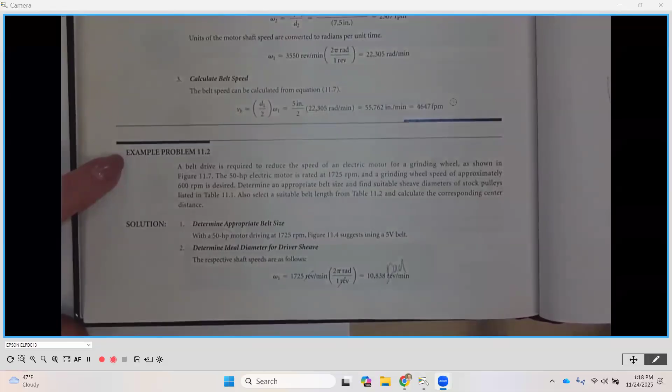Okay, so we're going to look at example problem 11.2, on page 306. Here we have a belt drive required to reduce the speed of an electric motor for a grinding wheel, as shown in figure 11.7, at the top of the following page. So down here is our motor, and up top here is the grinding wheel.

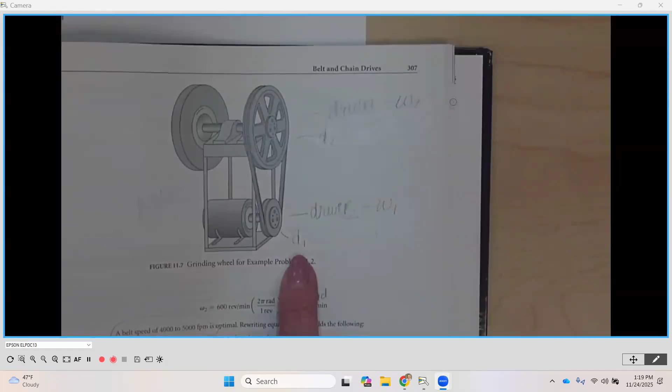As you can see, coming out from the motor there's a shaft, and mounted to the end of that shaft is a sheave. This is what we're going to call the driver. This is going to represent our omega 1, which is also the diameter of the shaft or the diameter of the sheave on that shaft.

Now there's going to be a belt, we're going to have to determine what that is. And then up on top, notice we have the larger sheave, which is called the driven. That's going to be our W2. It is on a shaft that is connected, driving at the same speed as this grinding wheel out here.

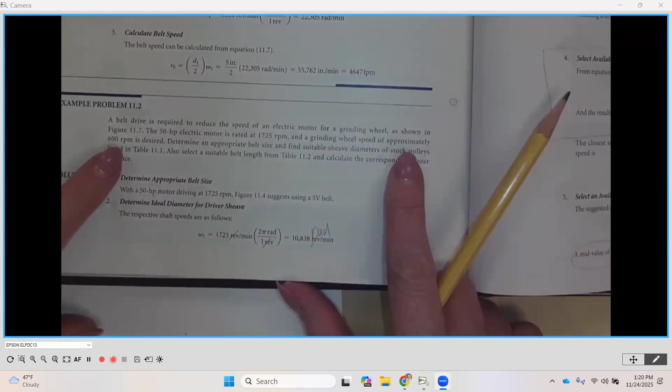Now they're telling us that the electric motor is a 50 horsepower motor, rated at 1725 RPMs, and the grinding wheel speed needs to be approximately 600 RPM. So approximately doesn't mean it has to be exact, but we got to be right around 600 RPM. So we're going from 1725 to 600.

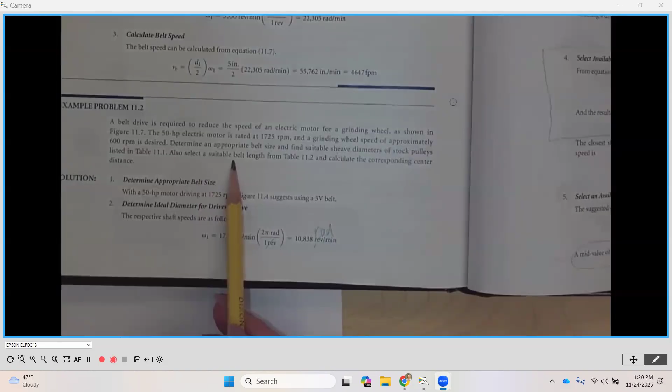They want us to determine the appropriate belt size and then find suitable sheave diameters using standard sheaves. Then select the suitable belt length from the standard table, and calculate the corresponding center distance. So this is a very practical problem for out in industry, where we're just given where the motor is, what we want our output speed to be, and now you specify the belt, the sheaves, and what the center distance is going to be.

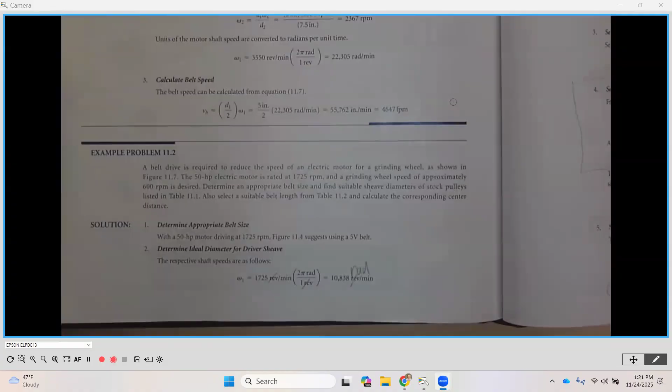So first things first, we're going to pick our belt. Actually, before we start picking our belt, let's identify the items that we are given and then the items that we need to find. So if we look here, we're given that our electric motor is 50 horsepower and is going at 1725 RPMs. As we said, that is our driver, so that's going to be our omega 1 or W1.

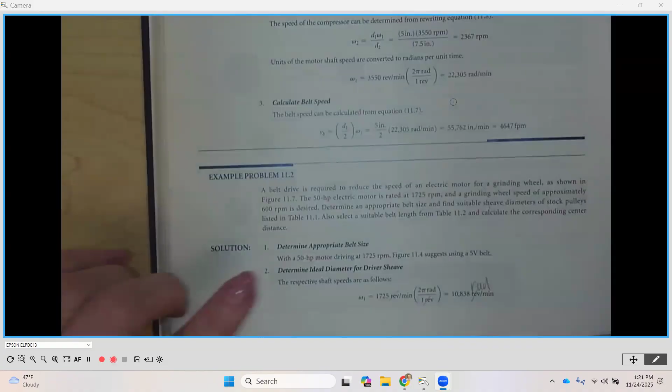So here we have W1 is 1750 RPMs. Okay, I'm sorry, 1725. 1750 is a more common one, but 1725 RPMs. And the power is 50 horsepower.

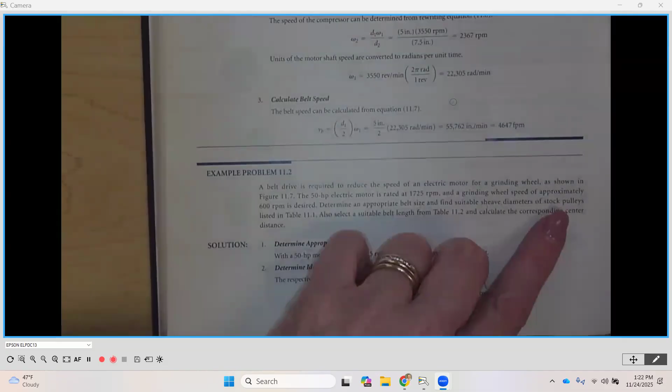We're also given that the desired output speed of the grinding wheel needs to be about 600 RPMs. So W2 is going to be 600 RPMs, and I'm going to say approximately. That's a target, if you would.

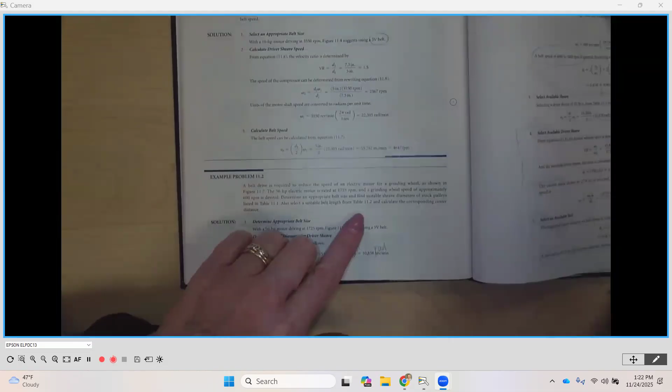And what we want to find is going to be the belt size. We need to find our D1, which is the sheave diameter 1, D2, sheave diameter 2, the belt length, which is capital L, that's the belt that's going to fit over the two of them, and then what the center distance is going to be, which is capital C. That's it.

Okay, so again, really nice practical problem here. First things first is going to be our belt size. So step number 1, belt size, and we are going to use that table, or maybe it's figure 11.4. Okay, figure 11.4.

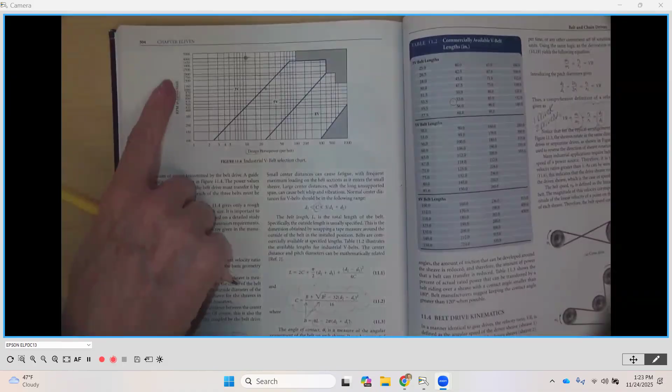Now here what we're going to do is we're going to find our faster shaft RPM, which is that 1725, right? It's going to be off of our driver, and then the horsepower. So go ahead and line those two up and see what you get.

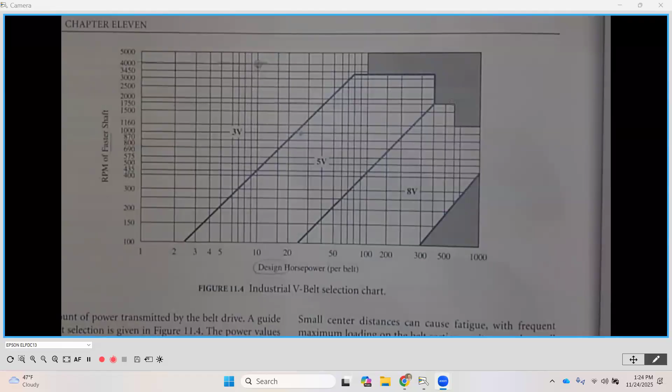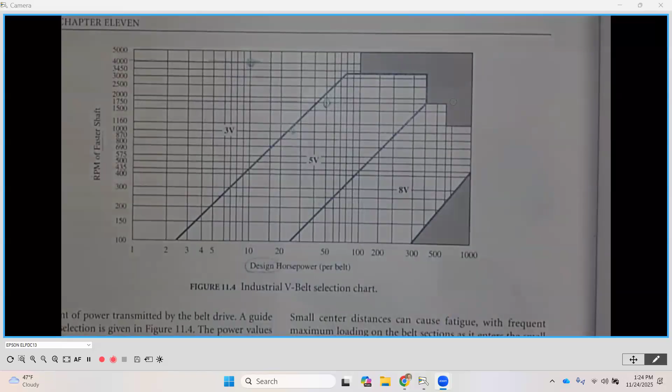So if we go over, I'm going to use the 1750 line, just because 1725 is close to that, and then 50 all the way up. So where those two come together, you're going to meet right about there. Now we are close to a line, but we're close to a line of being smaller, so we're going to stay on the 5V side here. So our belt size is going to be a 5V. We'll put a box around that, and check that one off. And if we check what the book got, they indeed got the very same thing, a 5V belt.

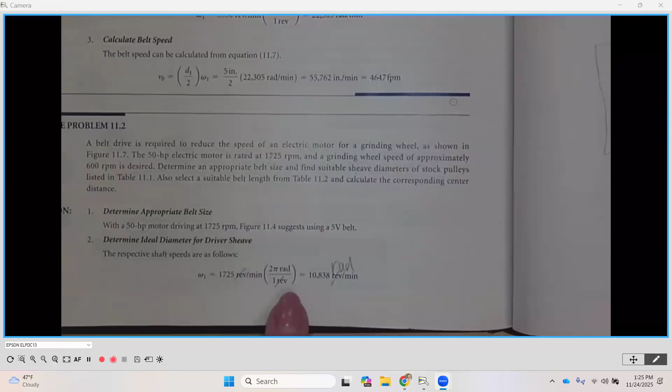The next step that they do here is determine the ideal diameter of the driver sheave. Now, they went ahead and they put their W1 into radians per minute, but let's look why. To get to our ideal diameter for our driver sheave, we're going to look over here first.

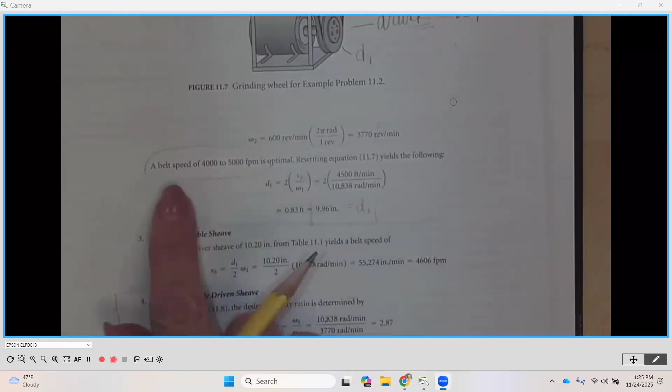We're going to use a belt speed within the range they gave us. If you remember, we had that slide where it said the optimal speed for a belt to operate at is between 4,000 and 5,000 fpm. That's belt speed, VB.

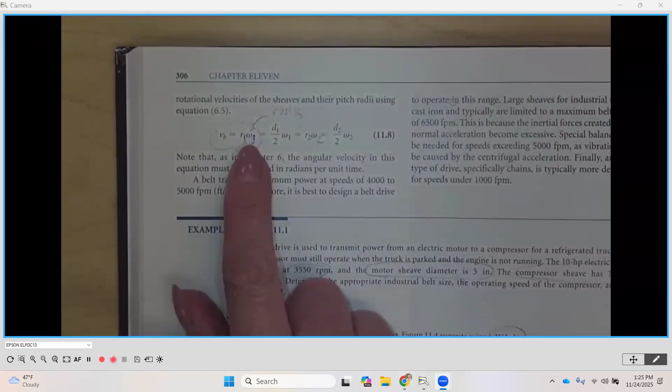If you remember, the relationship for belt speed was right up here. We know that belt speed is going to be the radius of the sheave multiplied by the angular velocity of the shaft. That's why we need that W in radians per minute. Since our 4,000 to 5,000 is in feet per minute, we're going to keep our angular velocity in radians per minute rather than radians per second, because otherwise we're going to have to go back and forth.

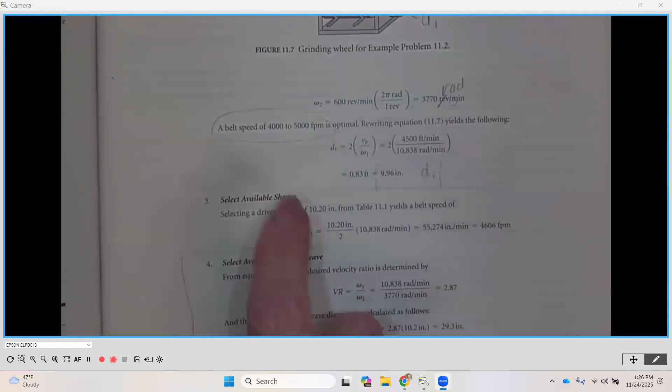So we are going to use that relationship. Let's see how that works. So we know, number two, what are we going to do? This is going to be the smaller sheave diameter, okay? And that's going to be D1. We want to determine what that is.

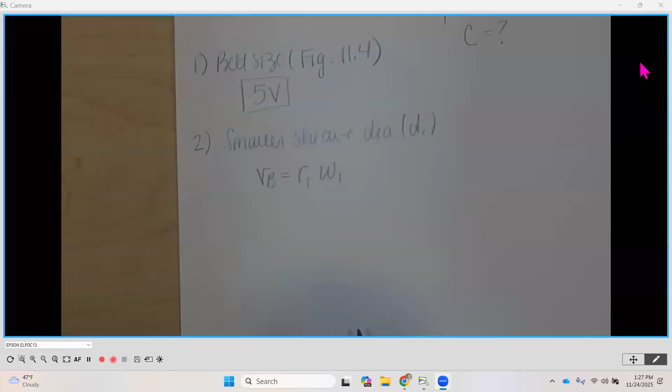So our relationship is going to be belt speed equals R1 times W1. In this case, this is going to be 4,000 to 5,000 feet per minute, the velocity or belt speed velocity. Again, the reason being is we're using that guideline of 4,000 to 5,000 as the optimal range for which you want your belt to be running.

Okay, so we're going to specify a number in that range. This radius is equal to the pitch diameter of our smaller sheave divided by 2. So this is going to be our unknown. Does that make sense? Okay.

And then W1, we just need to convert that to radians per minute. Again, we want it in radians per minute because we're going to have our belt speed in feet per minute. So the first thing I'm going to do is change our 1725 RPMs to radians per minute. So W1 equals 1725 revolutions per minute. We're just going to change it to radians per minute: 1 revolution, 2 pi radians. Revolutions cancel.

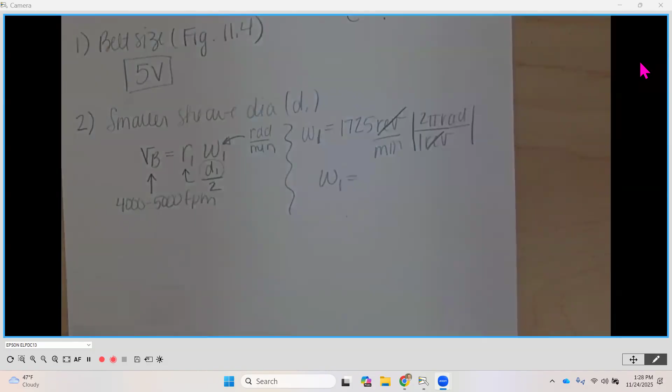So our W1, you get 10,838 radians per minute. That's going to be the number we put up here.

And then we're going to pick a number for the belt speed. To be consistent with the book, they picked 4,500, right in the middle of that range. Now I'm going to rearrange this to solve for D1. Go ahead and algebraically rearrange to solve for D1 in this case. I'll give you a minute to do that. Remember, our radius is going to be equal to D1 over 2, and we want to solve for D1.

Then go ahead and put your variables in. If you get 2 times the belt speed divided by omega 1 equals D1. Then go ahead and put your numbers in. I'm going to use 4,500 feet per minute for my VB, divided by... and don't forget to multiply by 2.

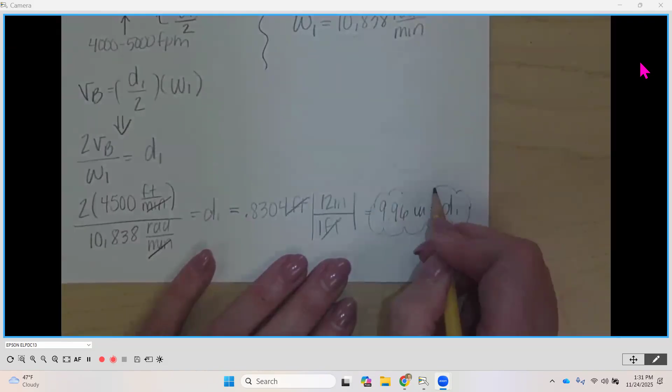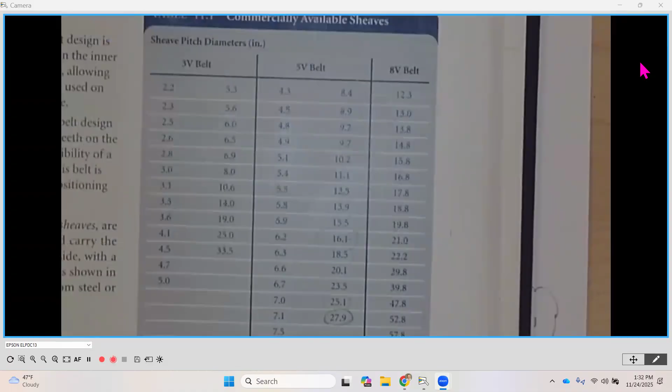Now, this is not our final answer for D1, because remember, they want us to find D1, but we want this to be commercially available. So we're going to take this number, 9.96, and go down the 5V column—the middle column of table 11.1 on page 303. We're down the 5V column, and we're seeing 9.96. So we want to do something close to 9.96.

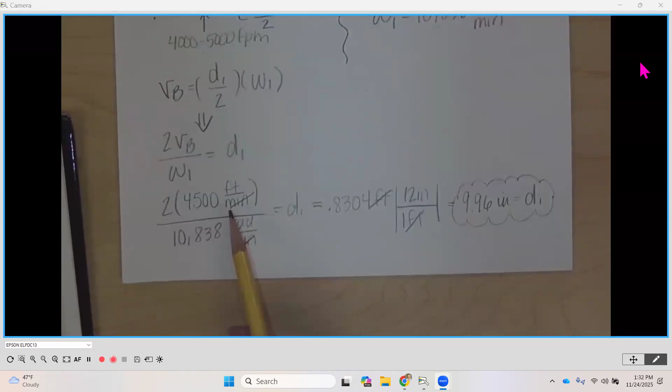We've got 9.7 and we've got 10.2. Now we're right in the middle of our zone. Remember, we determined this diameter based on 4,500 feet per minute. If we go a little bit smaller, that's going to affect that a little bit, not terribly much. So you, as the designer, could either pick 9.7 or 10.2.

I'm going to peek ahead. I forget what the book picks. They pick... what did they pick?

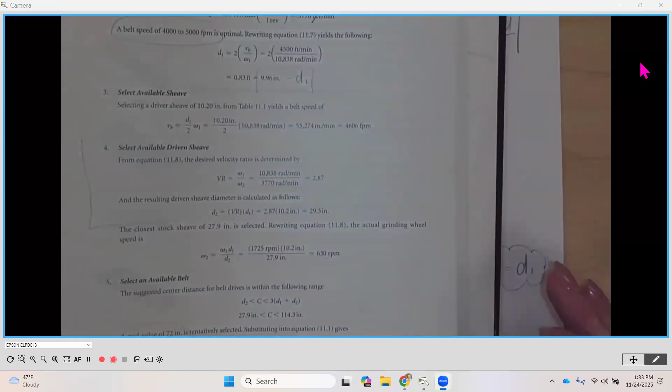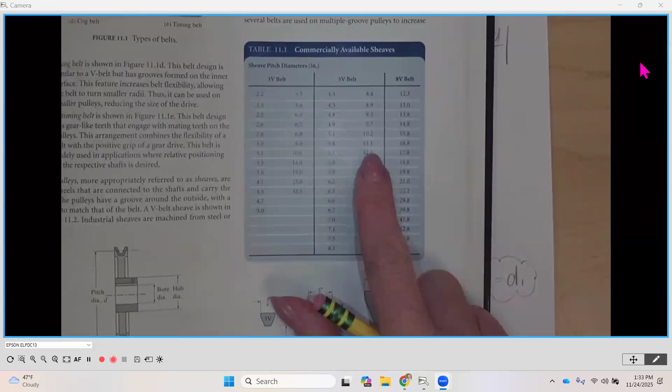Where's their D1? They have it written as 10 points. Oh, they've got it here on top. I see, okay, they picked it right there. So they picked 10.2. Oh, and then they went back. Yep, so they picked 10.2. I guess they didn't officially tell us, but they picked 10.2, so we'll be consistent with that.

But like I said, you could go down a little or up a little, and it's just going to affect that speed a little bit. Remember, that's an approximate. We just picked in the middle of that range, we picked 4,500. Now what we're going to do is find out, based on that number, how fast are we really going. What is the actual based on 10.2?

So we're going to redo this calculation, okay? But this time, instead of solving for the diameter, we're going to solve for VB. So I'm going to turn this over. We're going to VB, and I'll put in parentheses here, actual, ACT.

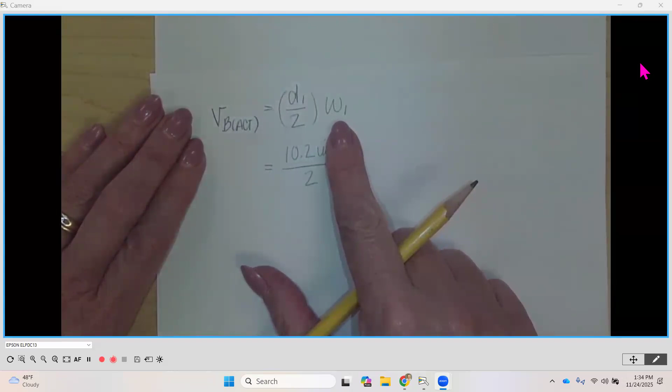This is going to be equal to D1 over 2, that's the radius, times omega 1. So now we know that we're at 10.2 inches on the actual sheave that we picked off of our table, divided by 2, times — and this again we have to have in radians per minute. So I'm going to go back over here, and that was the 10,838 radians per minute.

Okay. So our actual belt speed based on this diameter, in inches per minute. And then what we're going to want to do, to match up with the book, is change our belt speed to feet per minute. So we'll divide by 12 inches in 1 foot.

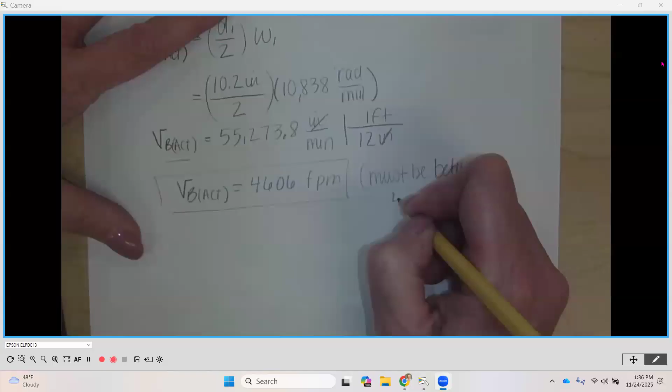So our VB, again actual, should be 4,606 feet per minute. And really what you're doing here is you want to go back and check: does this fall between that range of 4,000 to 5,000 feet per minute? And indeed it does, right? And again, that's the optimal range for the speed of a belt, okay? And if we compare it to the book, yep, they get 4,606 feet per minute too.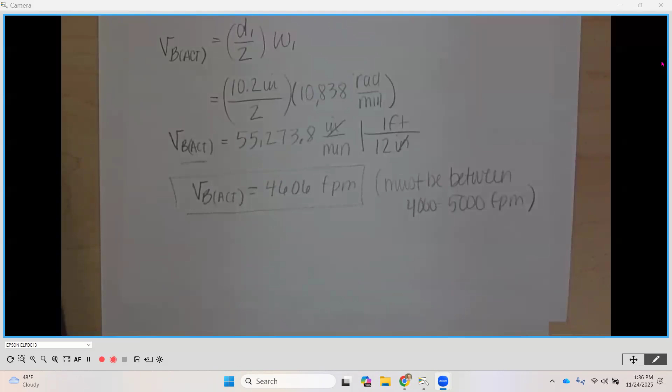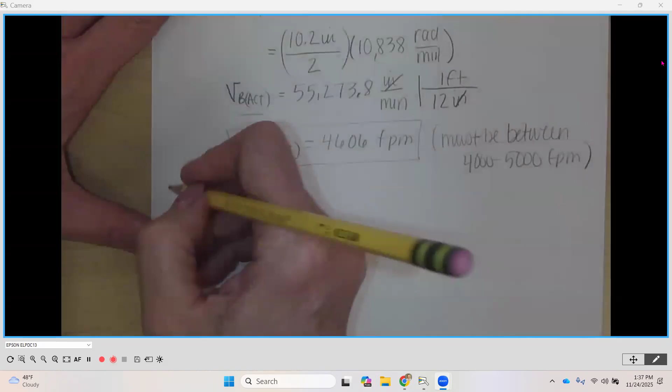All right, so now if we look here, we have our D1, okay. The next thing we need to find is our D2, right? Now, if you recall, using the velocity ratio, we can find our other diameter. Now, we haven't calculated our velocity ratio yet, but we're going to do that now. So our next step here is to find D2, but I guess this will be step number 3. We're going to find the velocity ratio first.

So we need our velocity ratio, which is going to be equal to D2 over D1. Actually, I'm going to take that back — we've got to do one before here. This is going to be our omega 1 over our omega 2. So for this problem, we know that our motor is going at 1725 RPMs, and we know that we want to be approximately, not exactly, at 600 RPMs, right?

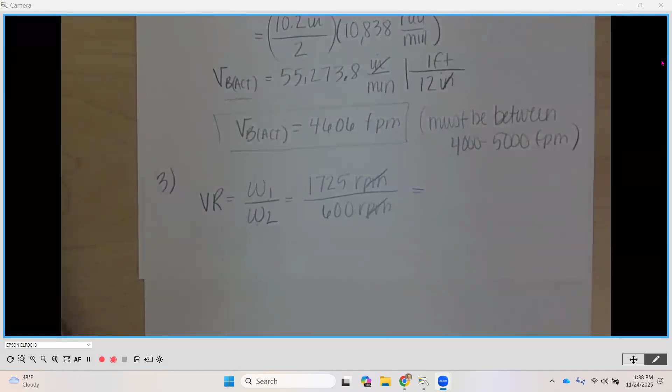RPMs cancel. This is velocity ratio, so we just have to make sure we have the same units top and bottom. And that velocity ratio, if I take 1725 and divide it by 600, it's going to be 2.875, equal to our velocity ratio. This is where our velocity ratio is then going to be equal to D2 over D1.

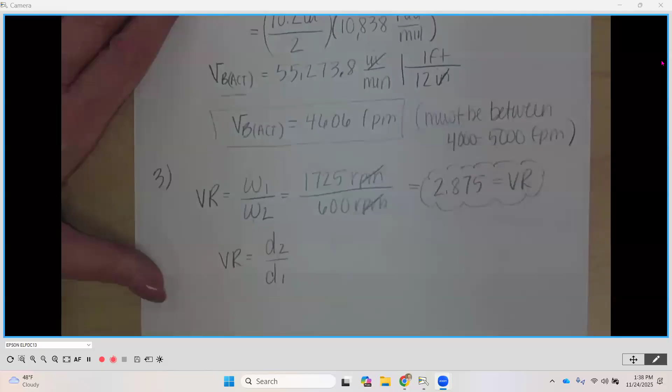We know what our D1 is, it's the 10.2. We want to now determine, based on this velocity ratio, what our D2 is going to be off of the chart of standard commercially available sheaves. So we want to rearrange for D2. This is going to be D2 equals velocity ratio times D1, which is going to be 2.875 — velocity ratio is unitless — times 10.2 inches.

This was D1, right, that we just determined — not the calculated value, the one off of the chart. So that means that D2, we take the 2.875 times 10.2, we get 29.33 inches.

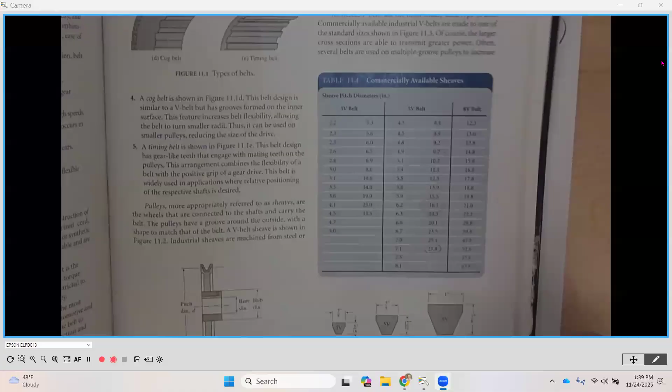Everybody follow so far? Now what we want to do is pick the closest commercially available sheave for a 5V. So I'm going to go back to table 11.1, go down this column here, and now I want to find something close to 29.33. Yeah, there's a 27.9. And when we want it to be bigger, right? Yeah, hold on one second. Closest is 27.9. Yep.

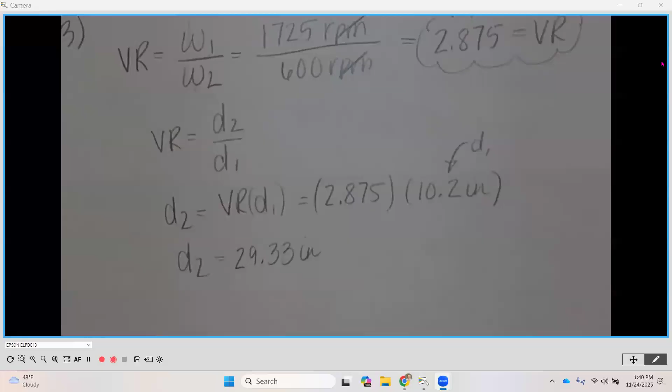Okay, so remember it said approximately 600. So we're going to go with what the book is going with, the 27.9. So they're going to go with 27.9 inches equal to D2. Okay, so that we're going to put a box around.

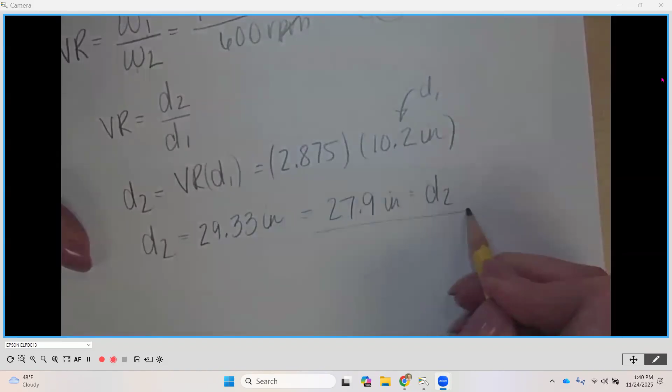They're going to go with that, but they're going to recalculate the velocity ratio to see where we are in comparison to 600. So we're going to recalculate our velocity ratio actual now. It's going to be equal to W1 divided by W2. Actually, no, I'm sorry, we already know our W1 divided by W2. It's going to be D2 over D1.

Okay, and now we're going to use these two values to find that velocity ratio. So we have 27.9 inches divided by 10.2 inches. They cancel out, and our new velocity ratio actual is going to be 2.735. So that's velocity ratio actual.

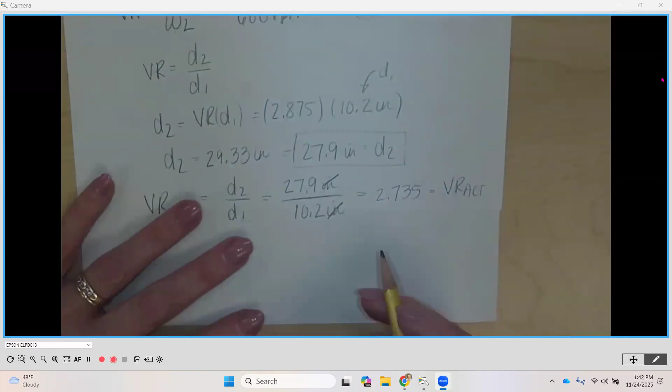Make sense? All right. And now we need to find out what W2 is, based on this new value. So we know that velocity ratio actual is going to be W1 divided by W2. So if I rearrange this, W2 is going to be W1 divided by velocity ratio actual. Does that make sense? Okay.

So we know our W1 is 1725 RPMs divided by 2.735, unitless because it's the velocity ratio. Okay, so I'm going to sneak it in here. Our W2 should be 630.7

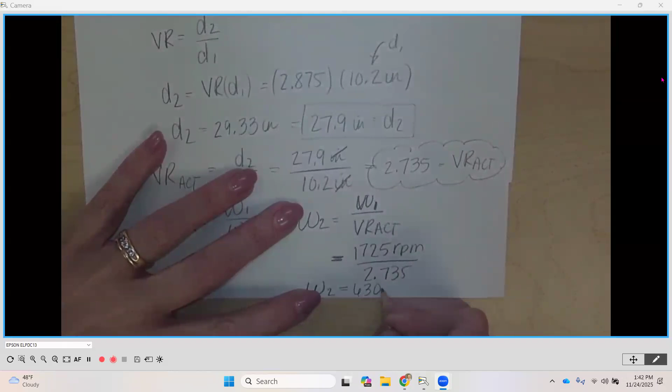RPMs. Okay, now you as the designer would be able to say, all right, the problem said approximately 600. Is 630 okay? I don't know. The book says, yeah, I think it's a little off. I don't know if I would go with that, but that's what they're saying. So they're going with it.

Okay, now if indeed it wasn't okay, what you would need to do is you would probably then go back to your input. So we picked 10.2. Remember, we were in between 9.7 and 10.2. You could go back and try the 9.7 or the 9.2 to try to get that to be a smaller value and then have your output be closer to 27.9. Does that make sense to everybody? So you'd have to play with it a little bit.

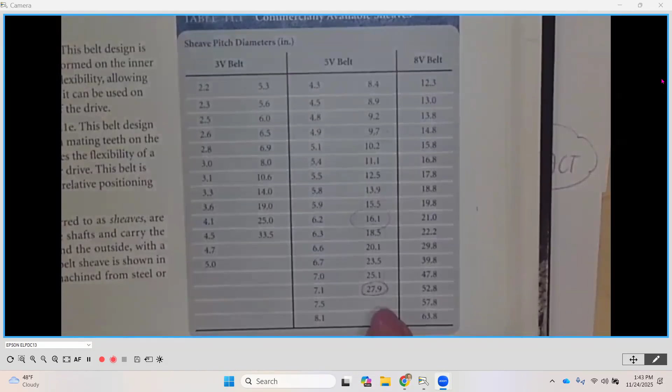They're going with it. Okay, so we'll just go with it so that we can continue to have answers that are similar. But you would analyze that and you'd say, okay, yeah, 630 is okay, or nope, I need to readjust. But they're going to say, yep, it's okay.

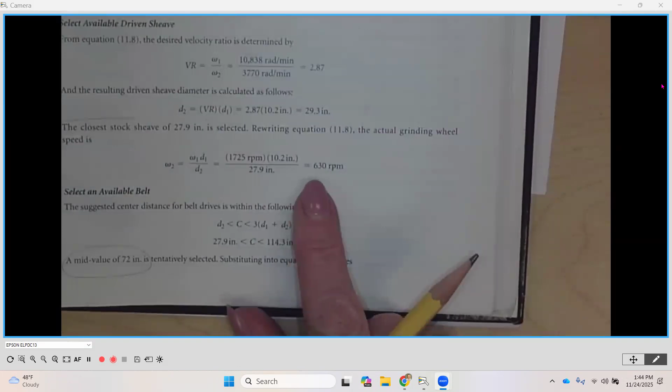All right, so let's kind of catch ourselves up to where they're at. Okay, so they are right here where they recalculated based on that value and they got 630 RPMs and they're saying, yep, we're going with it. So using now what we have specified here, okay, we have specified our D2. So if I go back to the beginning here, we have our belt size and we have our 2 sheaves, okay? So we're almost done.

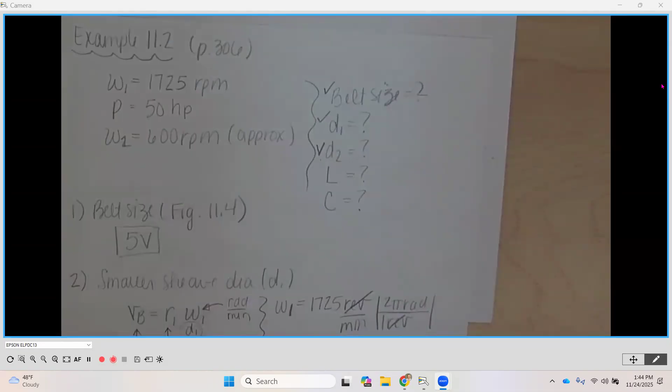So we've got, if you would, 2 of the 3 items that we need for our full drive. As we know, we also need a belt to fit over the top, right? We also need a belt to fit over top. Now, they did not specify a center distance for us. Most often you would have some sort of a target you were trying to hit that would be reasonable, but they didn't.

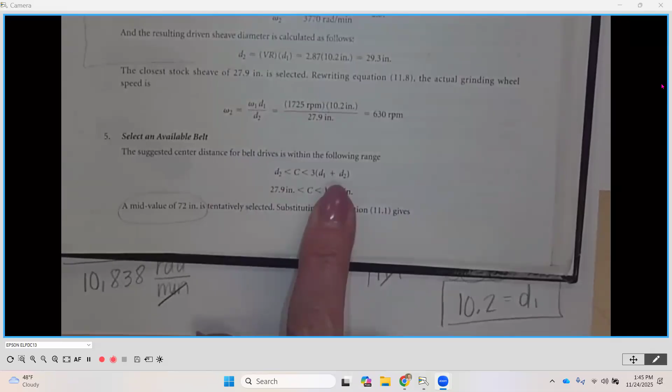All right, so what they're going to do is they're going to go ahead and they're going to select their belt now. The suggested center distance range is based on the diameter of the input and the diameter of the output. Okay, so we're going to calculate that range and make sure we get the same values as they do. Okay, so if I go up here, this is going to be, I think, step number 4-ish. Okay, so step 4, we are going to use the relationship D2 center, or less than center, less than 3 times D1 plus D2. Okay, and we have D1 and D2, so this is easy to find.

So our D1 is going to be 27, or I'm sorry, D2 is going to be 27.9. Okay, and our center distance is going to be in between then 3 times 10.2 plus 27.9. Okay, so our range then going to be between 27.9 and 114.3, and that's inches on each one of these. Okay.

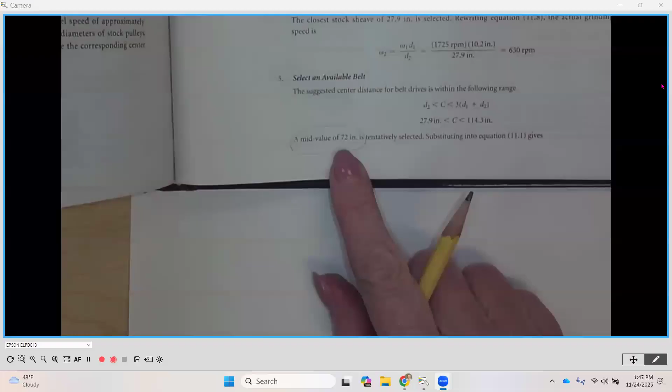Now, based on good belt design, this is a very wide range, as you can see. Okay, and you'll notice that the midpoint of that range is about 72 inches. That's what they did here. Here is where, again, you would have a better feel for your actual application, what you want that center distance to be. It would be in between those 2 numbers. So they're just picking literally out of the air 72, and that's what they're going to try to hit.

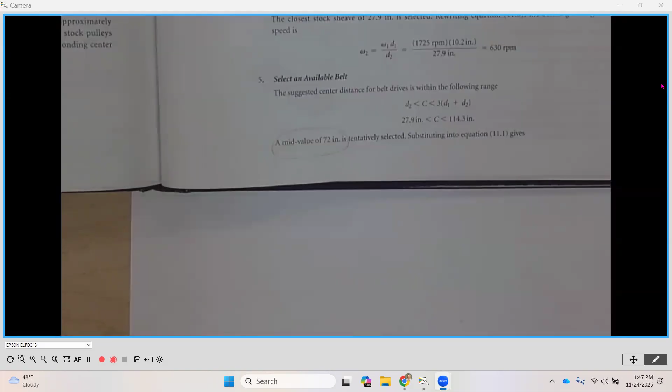Okay, now the next thing we're going to do is we need to determine what is the length of the belt, right? So the length of the belt, the equation for that is right here. And notice that we need a center distance, and that's where we're going to first determine an approximate length based on an approximate 72-inch center distance. Okay, and then we're going to see, okay, is that length on the chart here as a standard belt length?

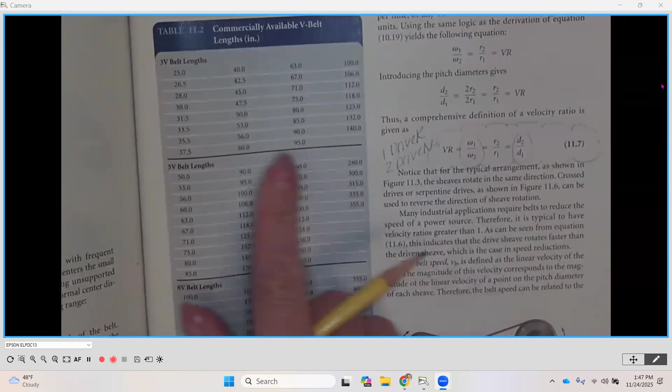Once we pick that belt length, because it's not going to be exact, once we've picked a belt length that we're going to go with, then we're going to go back and calculate the actual center distance, and we're going to see how we compare to that 72.

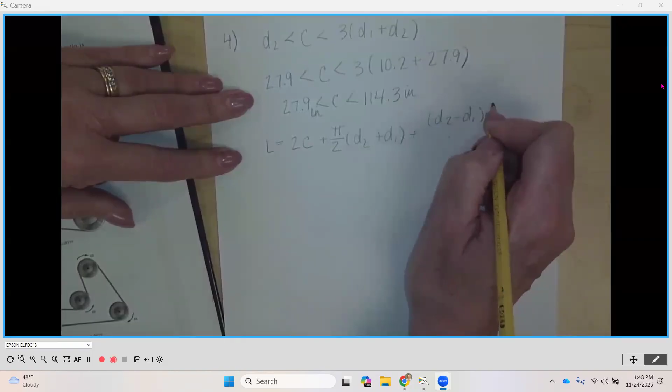So we're first going to calculate our length here based on an approximate 72-inch center distance. Continuing on in the step here, our belt length is going to equal 2C plus pi over 2 times D2 plus D1, plus D2 minus D1 squared divided by 4C.

Where C equals 72 inches. C is going to equal 72 inches. Now this is just copying. This is equation 11.1, I'm going to write this here.

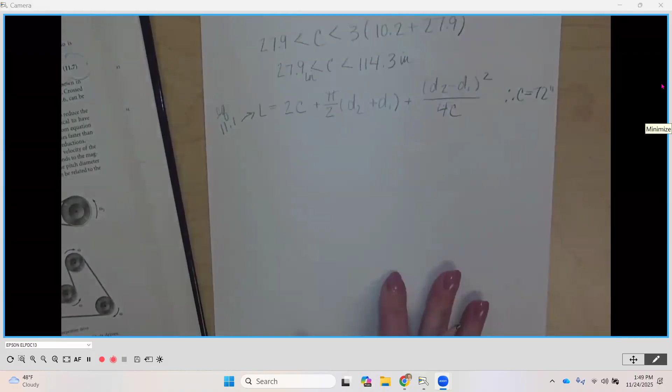Now we're going to put our values in. So we're going to have 2 times 72 inches plus pi over 2 times, D2 was 27.9 inches plus 10.2 inches. I'm going to run out of room here, I'll go down over here. Plus D2, which is 27.9 inches minus 10.2 inches, squared, divided by 4 times 72 inches.

So go ahead and perform that math and make sure that you get right around 204.9. I'm going to do mine here as well.

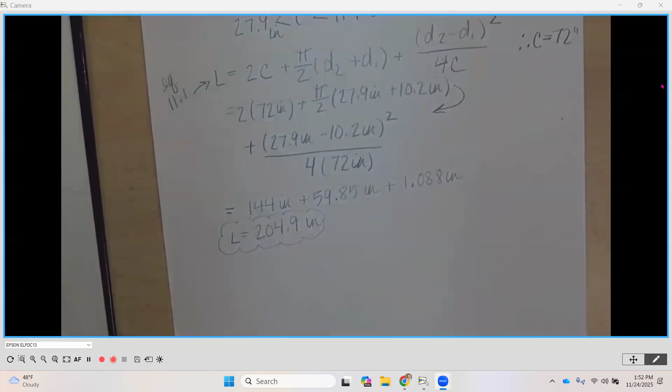So now what we're going to do is, remember, this L is based on a generic 72, just pulling it out of the air, right? Now what we want to do is take this length of the belt. Remember, this is a continuous belt, so they are made in standard sizes. We're going to go to table 11.2 on page 305.

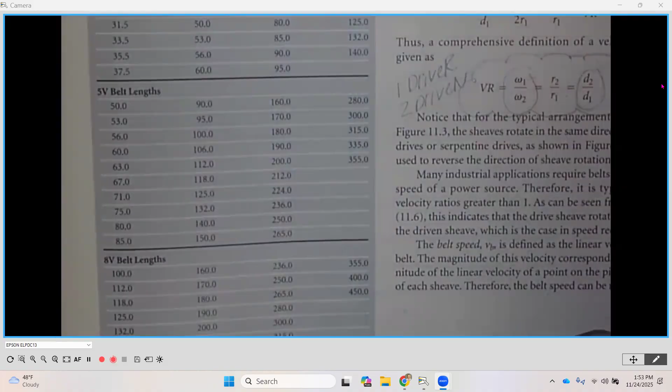In this 5V section, we want to pick what is closest to 204. Now you'll notice you have 200 and you have 212. The book went ahead and picked 212. You as the designer, it would be your discretion on what makes sense for your design. If a 200 is one that you put on another machine and you have those in stock more regularly, you might pick that one. But the book went with 212, so that's our actual length. L actual is going to be 212 inches, and this is from table 11.2.

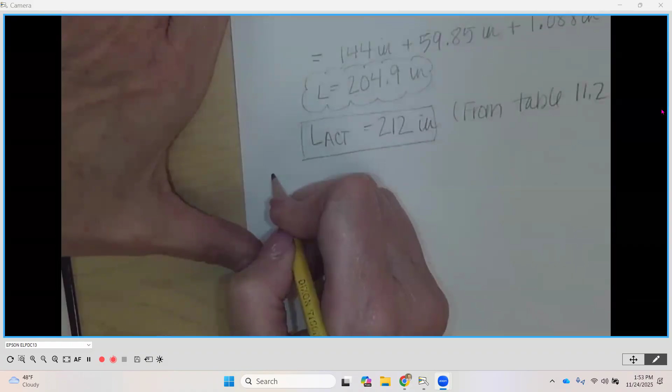Now, our last step, if we go back over here, we now have the length specified, so the last step is going to be center distance. Now you might say, well, we already did the center distance, it's 72. Remember, when I calculated the 204, that was having a 72-inch center, right? But now we picked a standard belt, that center distance is going to change a little bit. What do you think it's going to be, larger or smaller than 72?

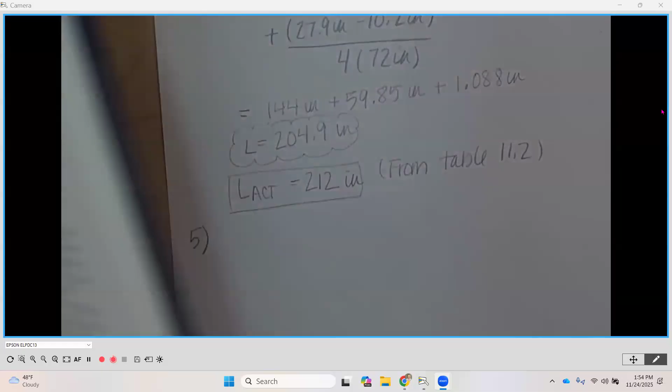I think our center distance, remember, center distance is this, a little bit larger probably, right? Because our belt got a little longer. So a little bit larger than 72, that's what we're expecting. Now what we're going to do is, this is a two-parter, so we're going to calculate B first using our new lengths and our diameters, and then we're going to plug it in up here into the center distance.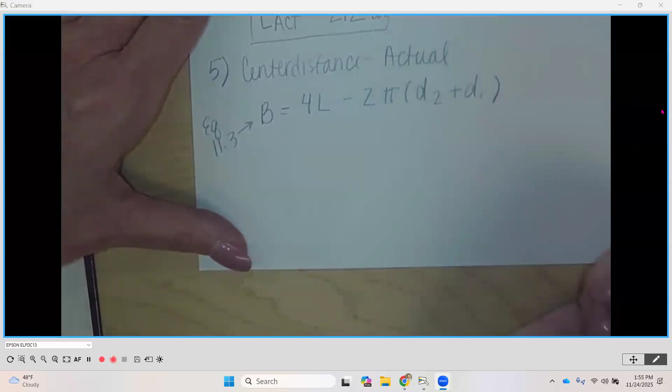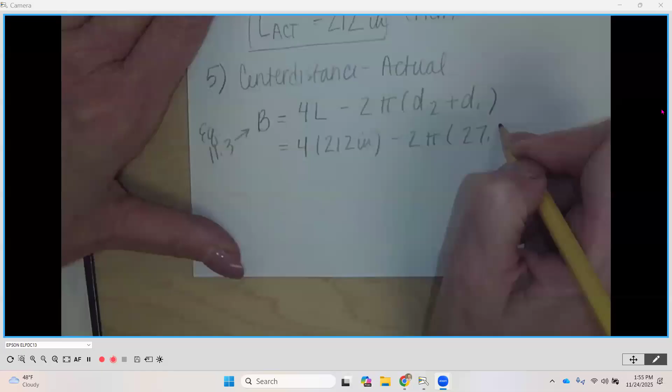So we'll do this in two parts, this is going to be calculating the center distance actual. So B is equal to, again this is equation 11.3, B is equal to 4 times L minus 2 times pi D2 plus D1. This B in between is just an intermittent equation, that's all. So that's going to be equal to 4 times 212 inches minus 2 pi times 27.9 inches plus 10.2 inches.

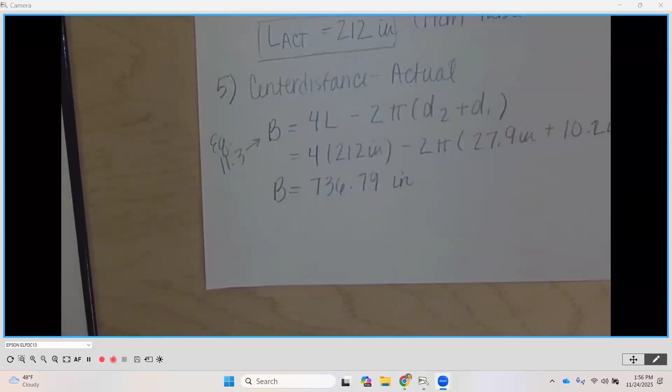So B is equal to... you get 736.9, or I'm sorry, 736.79. Let's look in the chat here. Did anybody else get 736? I only did it one time through.

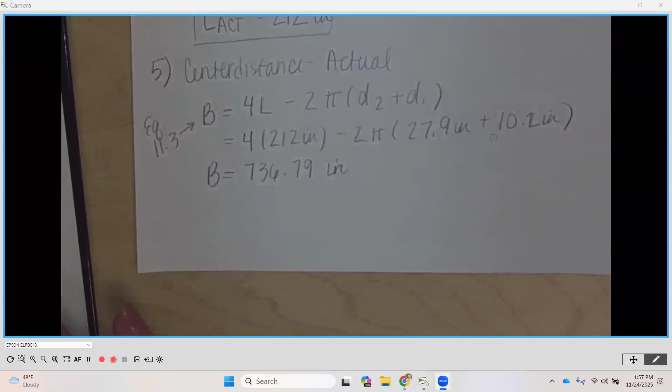Two times... Oh, I know why, I know exactly why. I subtracted, it's a plus times minus. Yep, 608, right? 608.61. Yep. Sorry about that, I did a subtraction here because I think we did that earlier, it was in my mind.

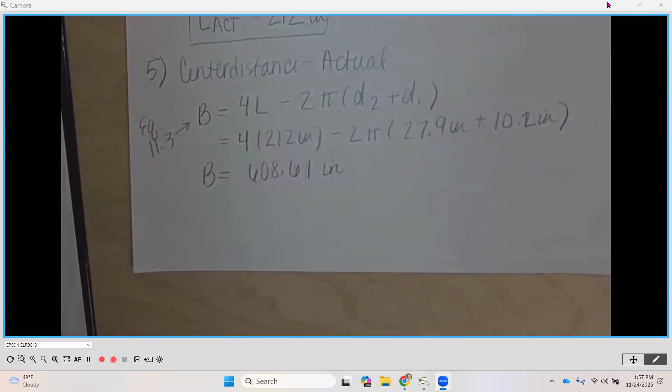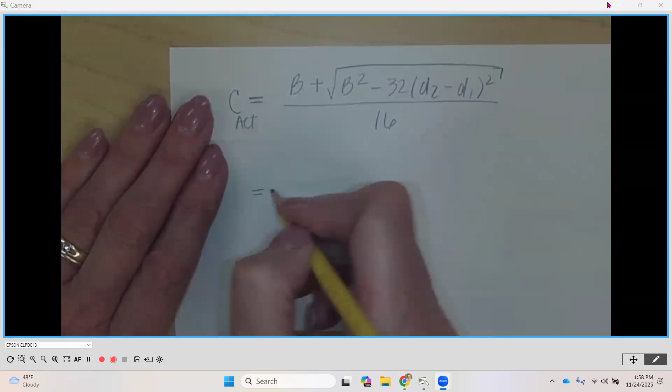So now we're going to take this B and plug it into equation 11.2, which is the center distance. Notice you have to square the B underneath the radical here, and then square this quantity as well. So let's write out this one: the center distance actual is equal to B plus the square root of B squared minus 32 times D2 minus D1 squared, all over 16. So our number is 608.61.

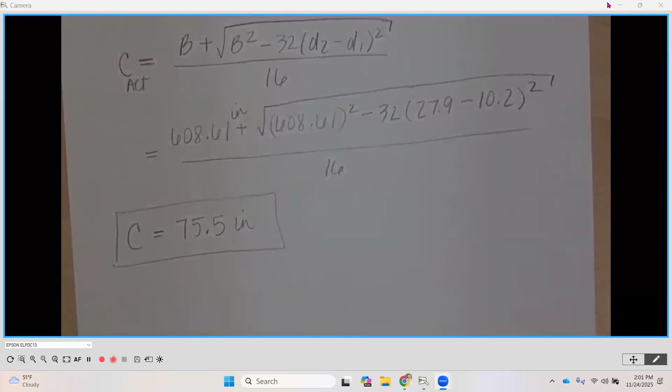They're wrong. So if you're comparing to the book, you got 75.5. If you're comparing to the book, I'm looking and thinking wait a second, they got 71.98. But if you look at their B, instead of going with the 212 like they said they were going to, they re-put in the 204.

So what'd you say? It just went in, yeah. Because now it's 71.98, which is basically 72. So we were expecting it to increase a little bit, because we went with a longer belt. So 75.5 is going to be our center distance.

So that is the last item on our list. For this problem, like I said, very practical: all we're given is a motor speed, what horsepower is coming off of it, and what output you need.

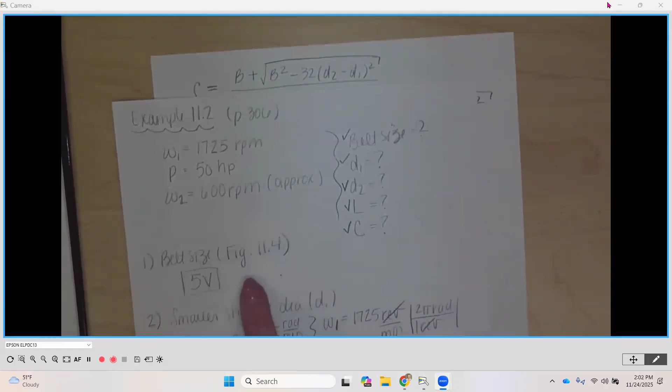So we started by finding our belt size, finding the smaller sheave, which ended up being a 10.2. Then using the velocity ratio, we found the belt speed, and then we found the larger sheave. Using that larger sheave, we found the output speed.

This again is something you'd check: yep, that's okay, or no, we want to refine that a little bit, like we talked about when going through it. Once we have that, we can pick our length of belt—it's a long process.

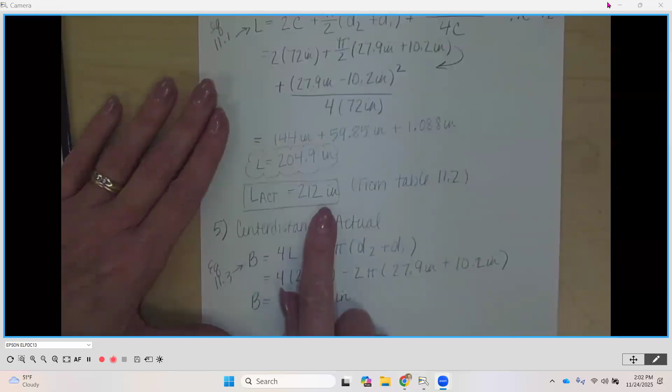We calculated an approximate length, but then picked an actual one off of our chart. Once we had an actual, we determined the actual center distance using the specified belt from the chart. So any questions on that application?

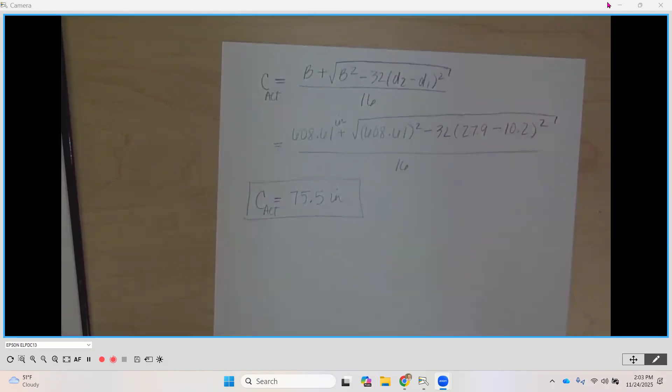That is the second and last example I'm planning on going over today. Example 1 and example 2 are going to be part of your practice problems. You are ready now to start some of the assignment 6 problems. So what I'm going to do is go over from example 1, example 2, and then chains are next—we'll continue with chains next time we get together.

If we look at our practice problems here, we did the first 2. So those, you're not ready to hand in yet, but after our chain design problem you will be. Let's take a peek at the end of our chapter—the problems start on page 313. I'm going to go underneath my camera again.

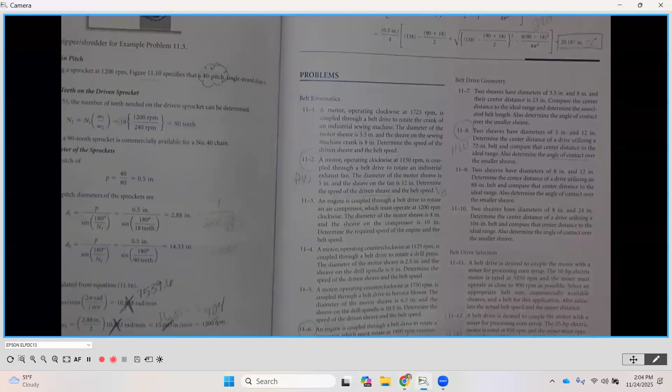The first problem, belt kinematics, 11.2, you'll be able to do because it's a belt problem. You'll also be able to do 11.6, as well as 8—this is geometry—and then drive selection, 12.

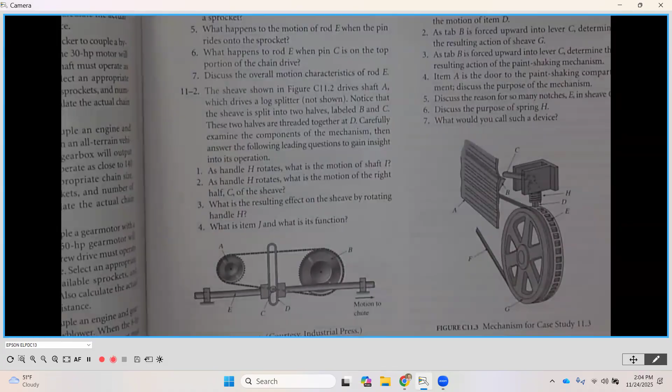I believe that's all of them. Then it transitions over to chains. So the first 4 problems you will be able to do, which is half of the assignment. Then the last 4 problems are going to be based on chains.